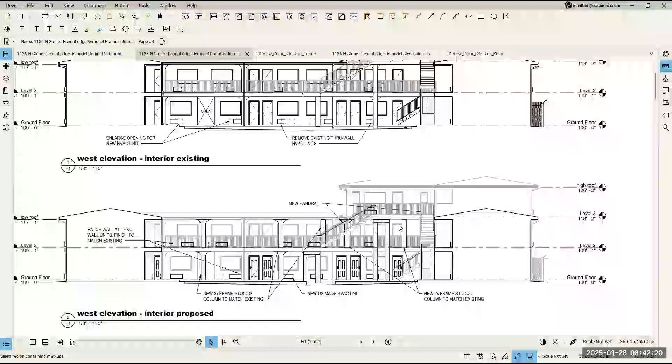This is, we just felt, getting very busy. Here's a 3D image of the same information. With those columns and all of these different items here, we are seeing... yeah, okay, good. It's really taking away, and in our opinion, it was taking away from the structure and from the original look of the hotel.

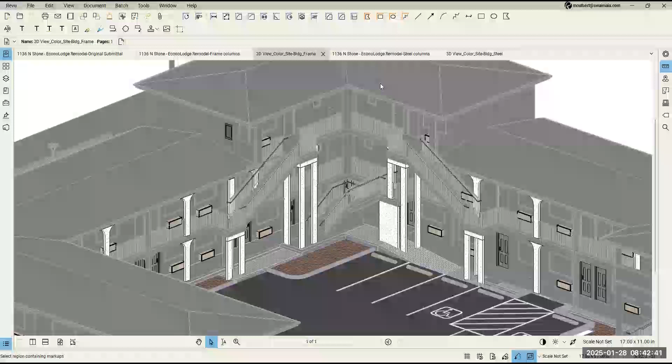So we've worked with a structural engineer, and what we've come up with is maybe changing from those wooden frame stuccos, leaving all the existing ones along the building, but replacing the ones we're adding with just a steel column. So we would do a steel column from floor to the roof above.

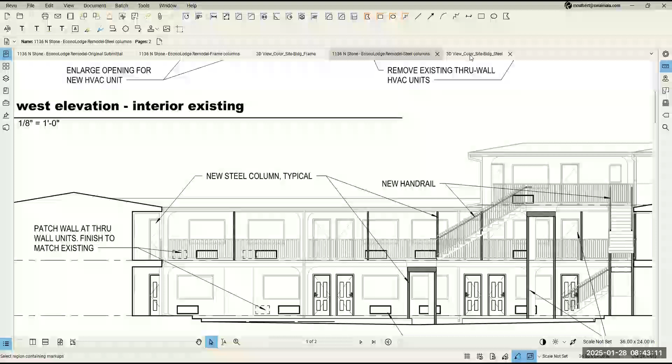That would give us our support at the rail. We would do a steel column with a beam across, and this would be in an L pattern. So here's the same 3D image. We do it here, and then there's a beam underneath the stairwell and another column supporting the stairs. Each one of these would have this simple L-shaped configuration to support the stairwell, the landing, and then the guardrails would be supported with these smaller rails that we feel are less obtrusive to the structure than this configuration.

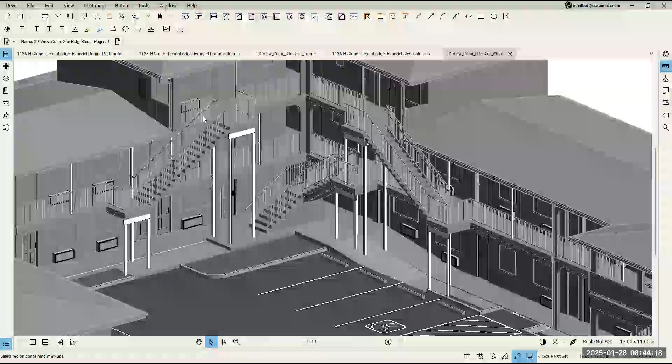So that's the biggest change we're making to what was presented to you originally. A few other things: these stairwells do not have handrails at all. What is actually there is the original railing that was too low. Then they've added some additional steel on top of it to get it to current code height, but there is no handrail. So we need to add a handrail inside each of these, again leaving the existing guardrails that were there and what was originally with the building, just simply adding a handrail to each of the stairwells in all those locations.

Before you go on, could I ask you a question? Because you may move to a different thing. So in what you're proposing with just the steel posts, would you be getting rid of the stuff on the second floor with those columns, or just adding to it? Does that make sense? Yes, it does.

Let me go back to this photo. So what we would get rid of is these columns here that are presently supporting the stairwell. We would get rid of those, but anything else you see here would all remain. We would not disrupt any of that or change the existing look of the building.

And you're just saying that if you added replica columns beneath, that would just be additional ones that would be too busy, or was it just the longer ones that you'd be replacing with the thinner poles? It would be these lower railings or these lower landings as well, so we'd need to replace them here and up here. Yeah, sorry, maybe others understood that, but I just needed to hear it.

Okay, go ahead, please, and interrupt me with any questions you have. I'm going to make sure everything is clear here. So anything else that you see is existing, we would keep those. And in particular, because of the... let me change pictures. Because of the existing columns elsewhere in the building, those would all remain.

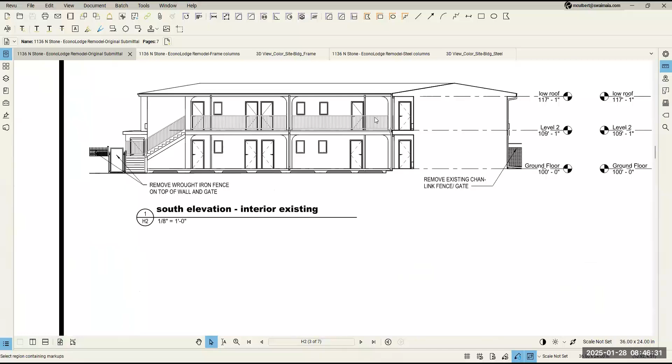For instance, there's existing columns here, and there's existing columns across the front facade. All of those would remain as is. This stairwell already has a beam supporting it. They're not having those issues here, and they're not having those issues on the other side, on the north building. So all of those columns would remain exactly as you see them. The only thing we'd be adding is a steel post to support our guardrails in these locations.

Okay, commissioners, do any of the rest of you have questions on that part? No, I'm good. Okay, all right. A couple other, I'm sorry, go ahead. Okay.

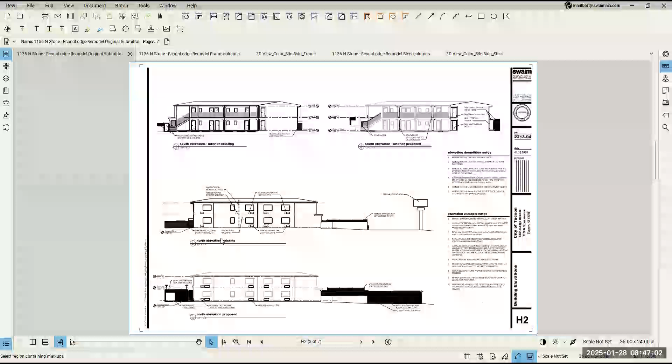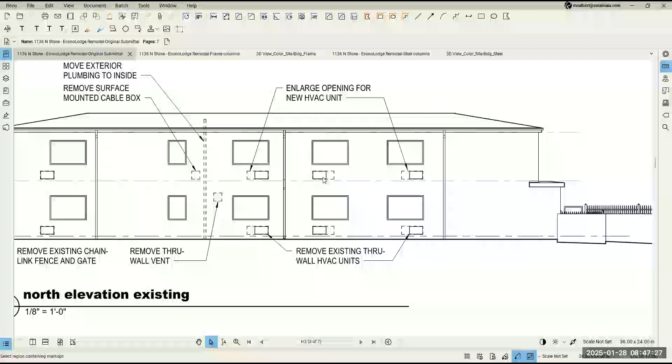A couple other key components here: the existing HVAC units, which are through-wall units, we're replacing with US-made units. As I mentioned before, this project needs to meet the Build America, Buy America Act, and all the American-made units are of course larger than what we have. Wherever possible, we will enlarge the existing opening in the same location, so that's what we're proposing to do in these locations.

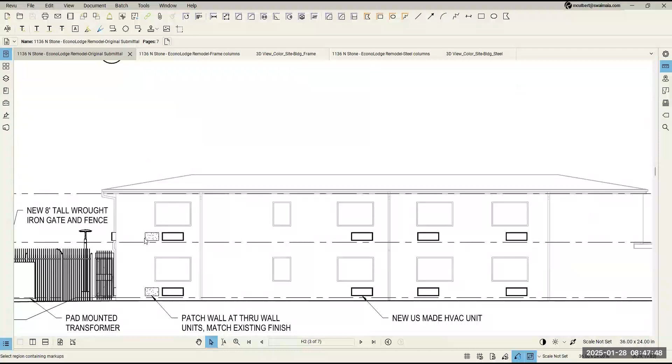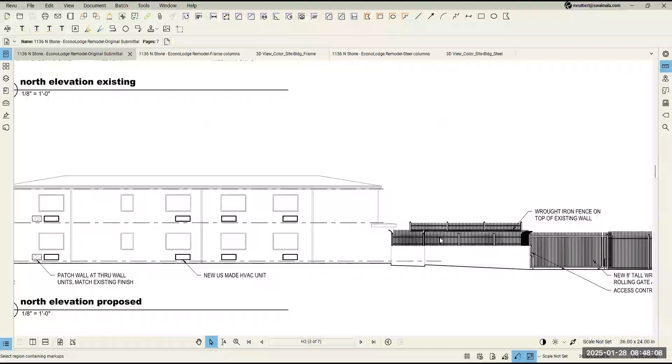In the oddball locations, such as these, where there's a structural concern, we're moving the unit underneath the window. All of these exterior walls are bearing walls, both inside and outside, and we're not sure yet exactly how this is structured. So if we put an opening underneath the window, we know we're not impacting the structural design itself. These existing holes would all be patched to match the existing stucco that's there, and painted to match.

One of the city requirements is wrought iron fencing for security purposes. This is drawn wrong, but let me go back to my site plan. We're proposing to do 2 rolling gates: one where the entrance would come off of Helen Street, and people would exit onto Stone. We would do 8-foot tall wrought iron. As I mentioned before, the existing pool would go away, but the walls around the existing pool would remain, and we're proposing to put wrought iron fence on top of those walls, that same 8-foot height. And along the alley here, we're proposing to put fencing to enclose an area for the occupants.

This is a location, as I mentioned, where Tucson Shade and Shadow wants to do some design work—put in some vegetation, some seating, some retention basins, those sorts of items. So we're showing some lighting out here, and again our security fencing. And right now, to meet City of Tucson Environmental Services requirements, we have to put a dumpster in here as well. We're squeezing that down on this end.

The key thing we're really doing, besides the fencing and these other improvements, is the electrical service—that needs to be upgraded. It's down here on the southeast corner of the building. Tucson Electric Power has let us know we're going to have to add a pad-mount transformer because of the size of the service, and Tucson Electric Power wants to move that up to the north end here. So we'd put that on the northeast corner of the building, still facing the alley, not the main road.

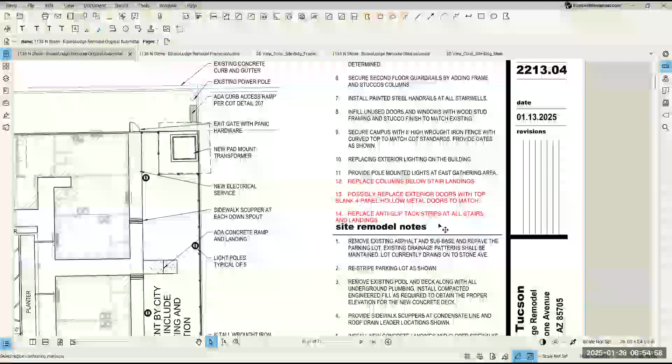We're hoping the coating looks pretty good on the floors, so we're hoping not to have to replace that, but it's an epoxy type of coating that's there now.

Quick question - I'm sure you'll be repainting when everything's done. Yes. Are you thinking of the same color-ish? No, I think we'd be going with more of a neutral, something more in the tan, not something so bright. Based upon some postcards, the original building was more of a white or an off-white color, and I think we want to go back to that sort of a color.

Do you have any of those postcards, like pictures of those, or no? Let me see, Pete, I don't remember if you texted or emailed those to me. Don't worry if you can't, but okay. There's a couple that folks found in the city, which was really interesting and neat, and it showed us that this masonry wall, the screen wall around the pool, appears to be the exact wall that's there today. So that's kind of nice to see. Well, that's good and helpful research to look at that kind of material.

So, okay, you ready for us to ask questions if we have them? Absolutely. Okay, commissioners, what do you think? I've horned my way in and asked some questions already. So who would like, Savannah, do you want to start?

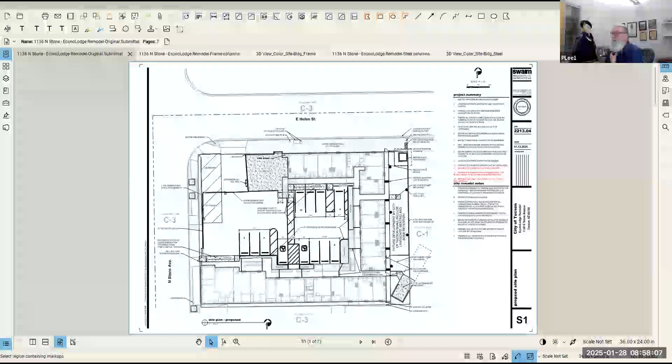You want to go ahead, Mike? No, go ahead Pete, I was just gonna chime in. So since we started the process, TFD came back to us - we would like to remove it, but we can leave it. TFD is okay, they actually had a call the other day there, and they're able to back up. So if it's something the board would really like to see, we can leave it.

I know Mike's put some bollards around the post. The post is not ideal, it's been run into several times. So that was one of our concerns. That big yellow post there cuts off about half of the apron on the exit.

But with the fencing, another way to mitigate some of that is we're gonna make an entrance off Helen and the exit off of Stone, so people aren't coming in - because if you've got someone trying to go out and someone trying to come in off of Stone Avenue, it's extremely dangerous and very tight. So we're hoping the fencing will help resolve that. So if you all want to keep this, we can leave it - we'd just like to put some bollards around that post.

Well, actually, just a little correction - what we were proposing is to put the bollards out of these outer corners to make sure larger vehicles don't hit the overhead. You can see right there how this one has been hit. I'm sure that wasn't the first and only time. So we're proposing the bollard be a little further out to protect the overhead.

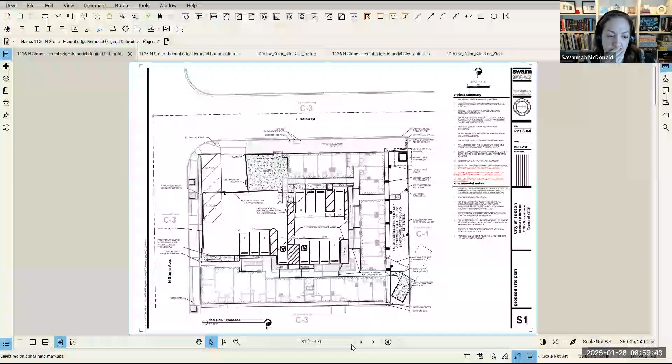That's not currently shown on the plan though, right? So would the entrance have to shift north a little? Yes. Okay, so the fencing and the gate would shift a little bit north. What Tucson Fire had asked is that right now there's a curb, and this is really where the access point is in and out. We would pull this curb back a little bit to give them a little bit more room to get around the portico and the bollards that are there.

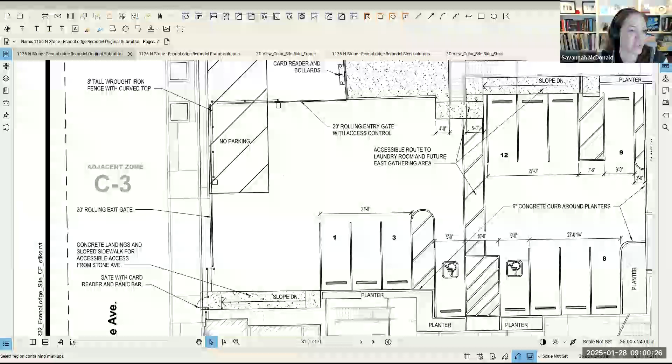Okay, yeah, I mean, I'll see what other commissioners think too. If I'm the only one, then certainly we can have a discussion, but I just think it's a neat element to the original use of the building as a motel. So I appreciate the effort to keep it. I do think it would be worthwhile, even if it's just a nicer, more generous entry - is that someone's unit right there, right? It's not like the office.

That actually is the office. Oh, it is the office. Okay, nice. So it kind of defines it. The manager, the person who stays on site 24/7, stays in this unit here. Okay, it kind of nicely distinguishes that space as a more public entry.

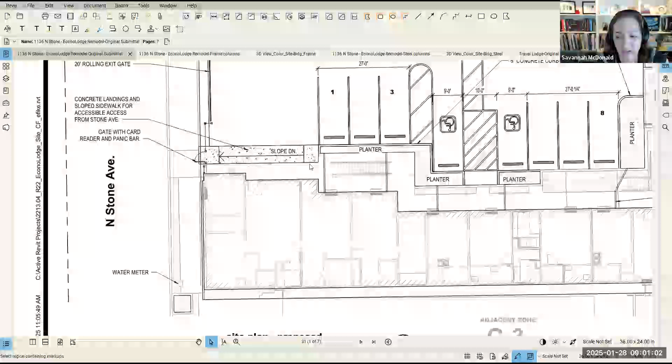That's all I had. I appreciate all the work, otherwise I think it looks good. Yeah, Savannah, I agree with you. And if others do, whoever makes the motion would need to mention that this would need to be added back on the plans.

Okay, so who's next, Ricky or Andrew? Yeah, I just have a comment about that overhang. The way it is right now, it's already damaged. Would you guys, if you're able to save it, what kind of reinforcement would you need to do to make sure it doesn't fall?

Well, the only thing that's damaged right now in that photo is actually the gutter. Okay, thankfully somebody didn't hit it too hard. That's where the bollards would come in. The bollards would be offset just enough so that if a vehicle got close, it's going to clip the bollard before it clips the building, the overhead building.

So then it's essentially no extra cost for you to keep that feature. It's not like this overhang is going to be either this or something else. Correct. I mean, yes.

I mean, there's some cost to add the bollard, but we didn't want to go into this meeting in particular if Tucson Fire came back and said absolutely not, we just don't have the clearance, we need to get rid of that. We wanted to make sure you guys were aware that that is something we were looking at. But as Pete said, they've come back and said they can make it work with some other modifications that occurred at the exit.

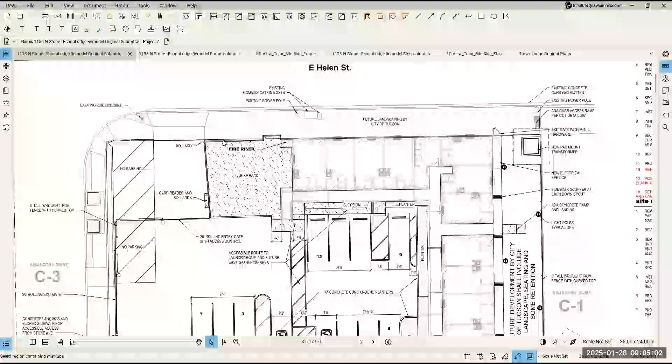Yeah, how tall is that pool wall and how tall is the fencing you're adding on top of it? So the fencing is a total height of 8 feet. The pool wall is about 5 feet tall along Helen, and then grade comes up, so it's about 4 feet with wrought iron on top of it presently on the west and south faces of it currently.

Okay, I was just curious about that. That's all I have. Thank you, Ricky. Andrew? Yeah, this looks good. I agree with everyone else's comments on keeping the portico and wanting some more info on that landscape.

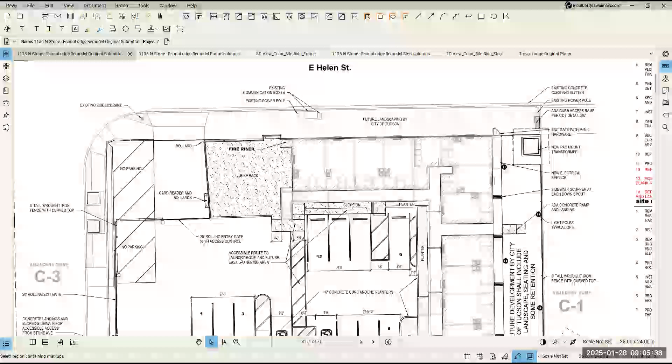The one question I was going to ask, and this may be a dumb question, is the parking lot seems very awkward with the entrance and exit so close together. Is it a requirement to have 2 separate entry points to this property?

To be honest with you, we didn't dig into the zoning aspect of that to see for sure. I don't believe it is. These are just the existing entrances and exits to the property now, so we were just maintaining them.

With the fencing and the rolling gates, the decision was to make one entrance and one exit, partly because these gates require a card reader to get in and out. A car can pull in off the street, use their card reader to get into the parking lot, then roll up to the gate. The sensors will sense the car and the pressure plates, then allow the vehicle out. But again, we were just leaving the existing entrances and exits that existed for the hotel now.

And you're absolutely correct, it's a very funky, not an easy way to get in and out of this property, that's for sure. My only comment that may help alleviate some of the issues with the portico and the awkwardness there is if that stone entrance just goes away. So maybe something to look at when you guys reincorporate the canopy.

The other question, I think I just missed it, though I think you did explain it - can you run through what you're doing with the condensate lines from the wall units real quick again?

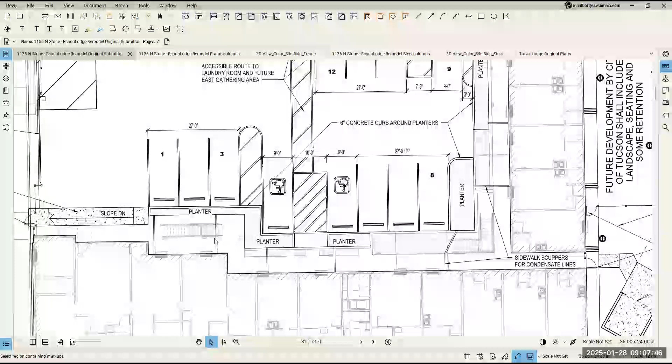So what we're proposing is to cut open the slab, the existing slab on the floor there, and run the condensate line out to these planters. They can't drain onto the sidewalk per code. So we're proposing to consolidate them together - for instance, these two would be combined and run together to get to this planter. Then we put concrete back in that exact same location where the scuppers would be placed.

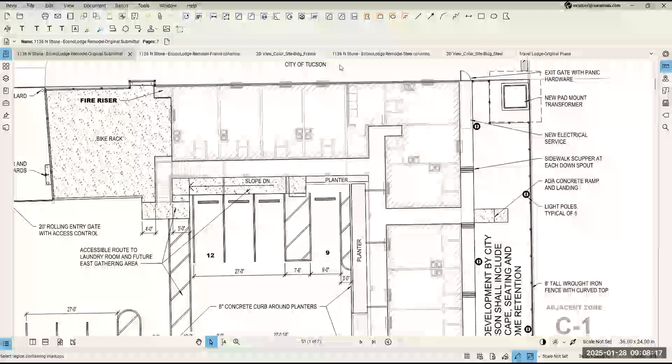Is that just for the units that are interior to the property? Correct. Anything on the exterior here can already drain onto the dirt on the Helen side, so those would drain out to there. Same thing on the south side of the building - there are several units on this corner that can drain onto the south area there as well.

Okay, great, thank you so much. That's all the comments and questions I had. Okay, thank you, Andrew, and everyone.

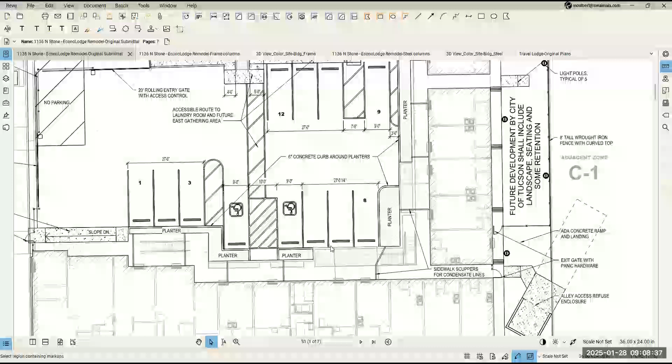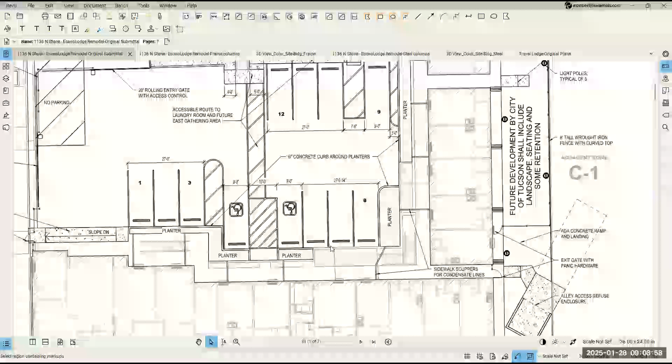We're gonna have to move quickly with a motion here because we do have, I think we're only - what are we on? What do we have till 10, people's availability? Is that right, Madam Chair? Yes. And so we do need to move forward. So, who would like to talk us through a motion? How about you, Savannah? You look like you're jotting ideas.

I do. I think, if it sounded good, to find the additional columns to be steel acceptable as presented. The portico to remain since acceptable to TFD, and then we'll just say rework driveways on the site plan as needed. I apologize, I kind of missed the conclusion of Ricky's comment about the landscape - would that come back as a minor review? Would we recommend that? Yeah, once the plans for the landscaping are developed, they should come back for review. Okay, or it's gonna be more than landscaping - there's probably gonna be amenities there or whatever. And then also I think we should mention that all changes get on the final plans, because when this is reviewed, it's sort of evolving, right? Yeah. I think it's settled out an awful lot now, just FYI.

Great, okay folks, are you okay with that motion that Savannah outlined? Yeah, I'm good. Yes. Okay, let's go ahead with it, Savannah. All right, whoops, hold on, put it in the right order. Alright, let me pull up the...